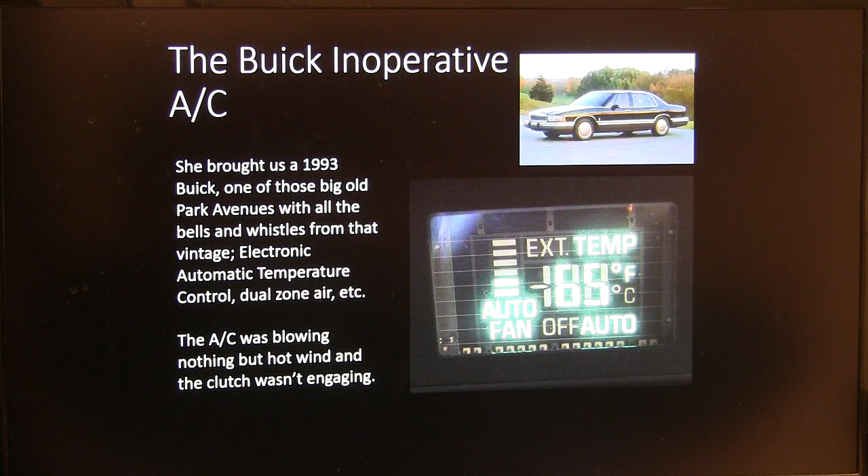Okay, here was a Buick with an inoperative air conditioner. She brought us this 1993 Buick, big old Park Avenue with all the bells and whistles on it. You gotta love those whenever they get an air conditioner problem. AC was blowing nothing but hot wind and the clutch wasn't engaging. First thing I wanted to know was whether or not it had refrigerant in it, and if there was refrigerant, what kind was in there.

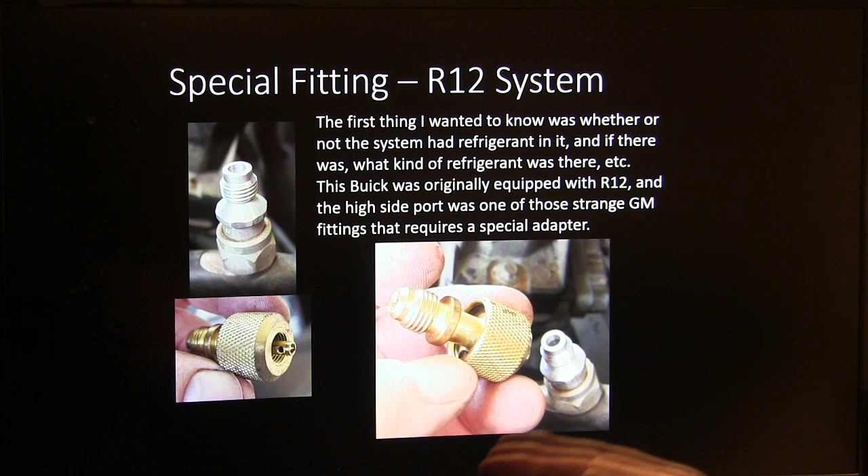This one originally had R12 in it, and the high side port, one of those oddball old GM fittings, required a special adapter. So I went ahead and got that. And this Neutronics refrigerant identifier, the one that I bought initially was like $1,000. I don't know what they cost now, but that's what it looks like. Everybody that's going to be doing air conditioner work needs one, so you'll know what kind of gas is in there before you do a bunch of work.

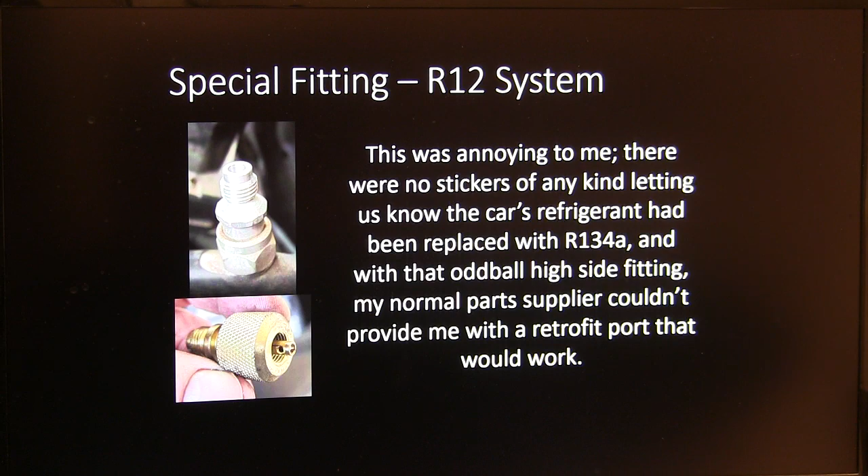So this R12 system was fully loaded with R134, but it still had the original fittings, which is sort of silly. I've seen that 2 or 3 times where somebody had doctored their gauges so they could put R134 in one that was valved for R12. This is a thing of the past. There's almost no vehicles out there anymore that still use R12 or have R12 fittings. Everybody's pretty much changed them over. Well, there were no stickers of any kind letting us know the car's refrigerant had been replaced, but whatever. So anyway, the processing center of that system is the HVAC programmer.

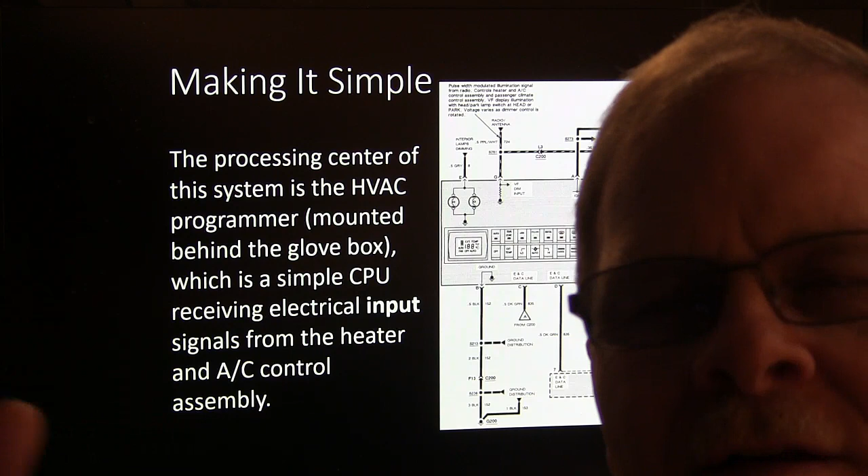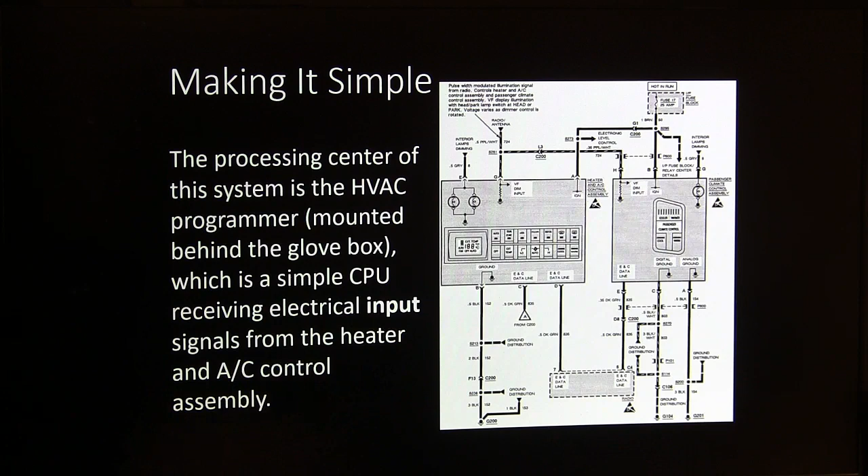GM likes to call the control that gives you your automatic temperature control the HVAC programmer. Even back in the early 70s, the Cadillacs had a great big old thing under the dash, and they called that a programmer. Nowadays they actually do it with different modules, but when they had an AC programmer, even in the late 90s and on up into the early 2000s, it would be a smaller box. One way or another, mounted behind the glove box is a simple CPU that receives electrical input signals from the heater and AC control assembly, and then it decides when the clutch needs to run and all that. It's like a little microprocessor that's just dedicated to AC.

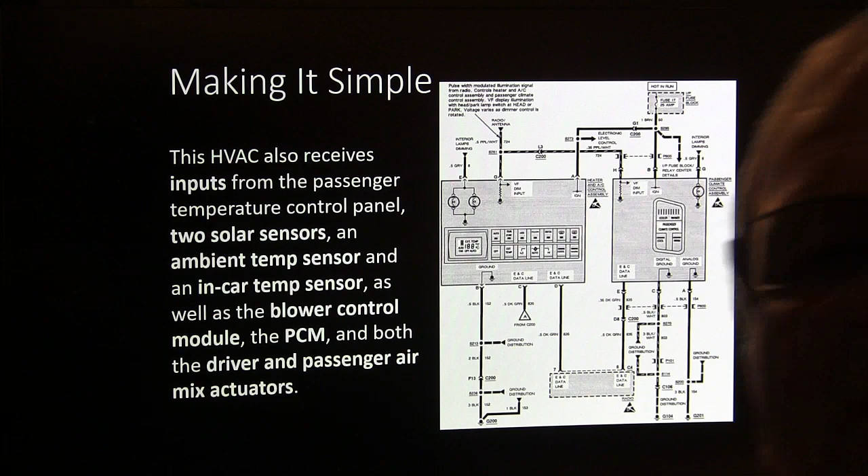Okay, so it receives input from the passenger temperature control panel, 2 solar sensors, an ambient temperature sensor, in-car temperature sensor, blower control module, PCM, both driver and passenger air mix actuators. All of that stuff is in there. This sounds really complicated and like a dog that you wouldn't want to work on, right? Well, we plowed into it anyway. Now the CPU in the HVAC unit untangles all that and feeds these signals out for AC clutch operation. But you might notice the PCM at the end of the day is what tells the clutch to come on. Now there's your little diode there.

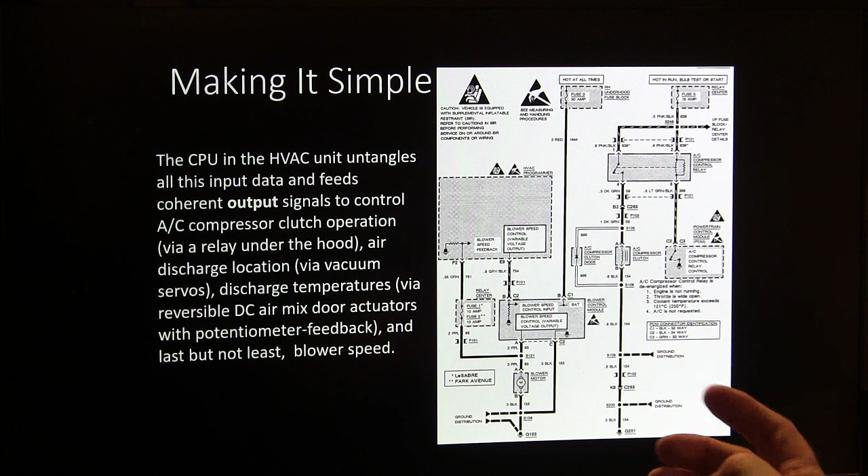And so the long and the short of it was, I got to looking through these schematics. I said, well, the first place I like to go when I do that. So we don't want to bog down in all that. Let's just start simple. Let's wipe out all that stuff and let's just look at what's important.

The compressor clutch relay is de-energized by the PCM when the engine is not running, when the throttle's wide open, when the AC coolant is hotter than 250, or when the AC is turned off.

We focused on the compressor because there was plenty of refrigerant pressure, but the compressor wasn't running. So let's see what we can do with that.

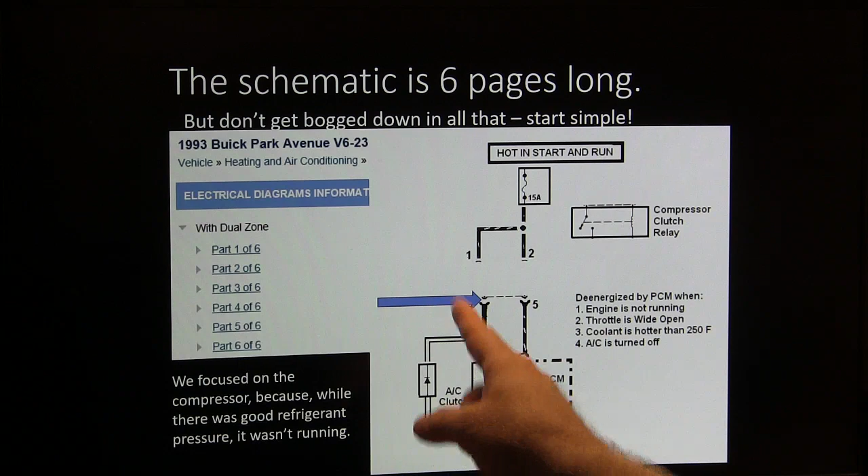We pull the relay out, get our test light, and connect it to hot. Then we check here to see if that light burns — that ground coming through the coil should burn the test light.

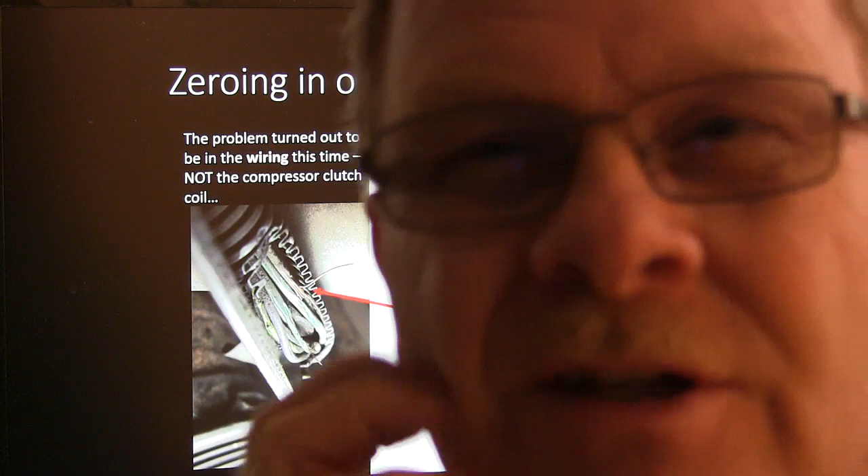The problem turned out to be the same one I showed you before in that other picture of messed up wires from this vehicle. You might remember seeing that picture. This is the vehicle it was originally taken on.

This had been too close to the belt, and it had chopped that ground wire in two. That was the deal — it was either the ground wire or this other wire.

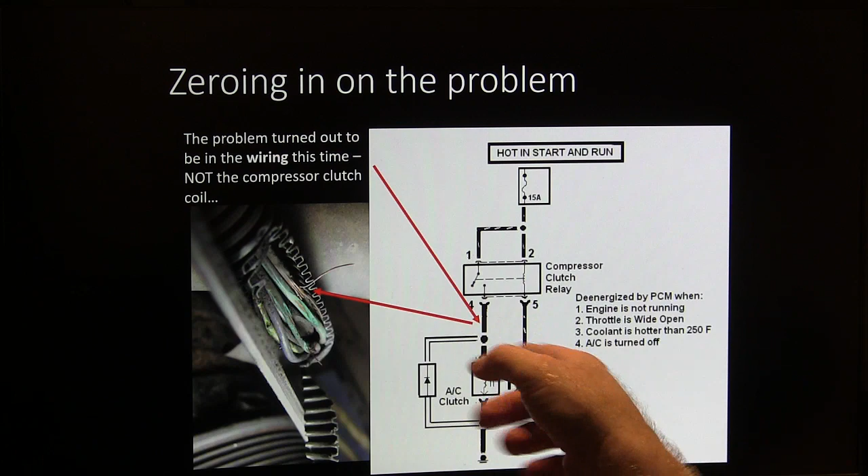I think it was that wire right there. Whatever it was, it had actually broken that circuit, and there was no power getting to the clutch. That's what the deal was on that.

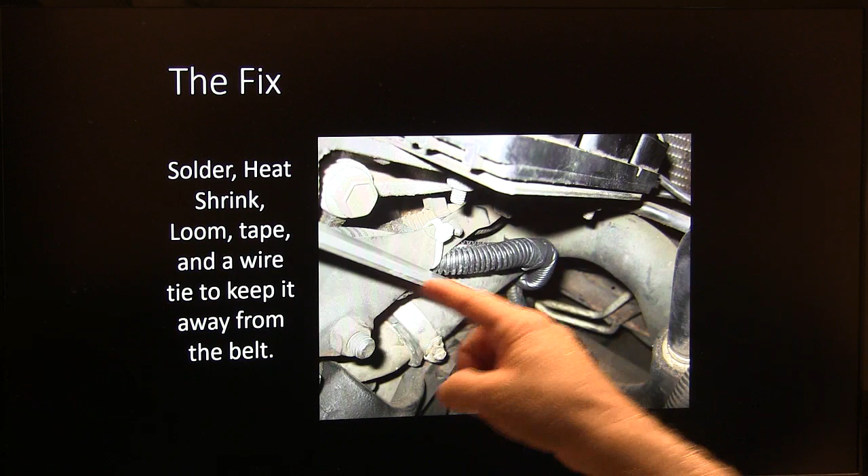So what we did was fix the wire, solder it, heat shrink it, put loom on there, and pull it back to make sure it was away from the belt. I don't know how that happened to begin with, because we had never seen this vehicle before it came to us with this problem.

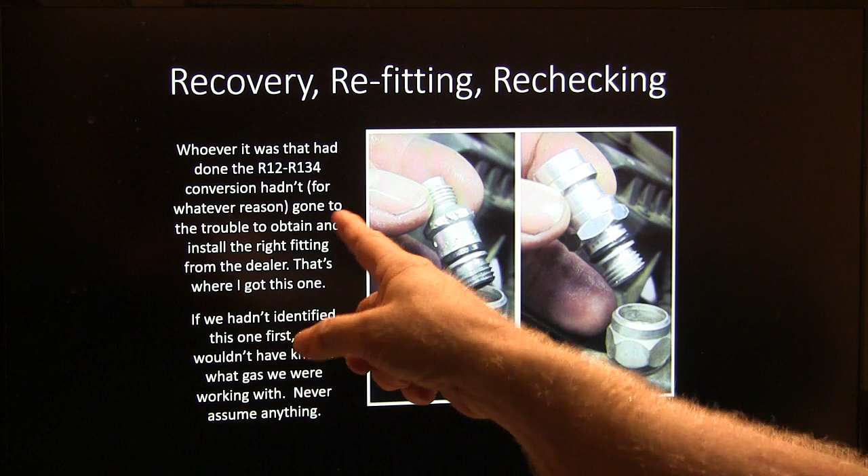Now, whoever had done the R12 to 134 conversion hadn't gone to the trouble to get the right fittings. It wasn't that hard to do — you just screw that one out and screw that one in.

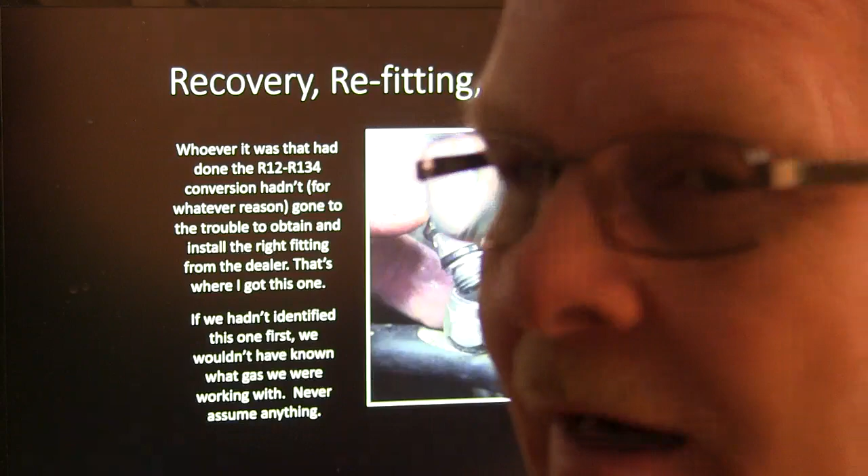I don't know if you've seen this before, but a lot of these GM cars, and pickup trucks particularly — when you're working on these systems, this silly fitting right here, after you've done all your work, suddenly that fitting's leaking. You can get those R134 fittings from the dealer.

You screw it out of there and screw that other one back in, with a little O-ring right there. That's fairly easy to replace in case you ever have one that's leaking.

Some people I've known at some places won't even hook their gauges up to that big port, because they're afraid it's going to start leaking. So they just use the low pressure side port to pull the juice in, and never even hook up to the high pressure side. That's kind of a cop out — you need to know what those pressures are doing.

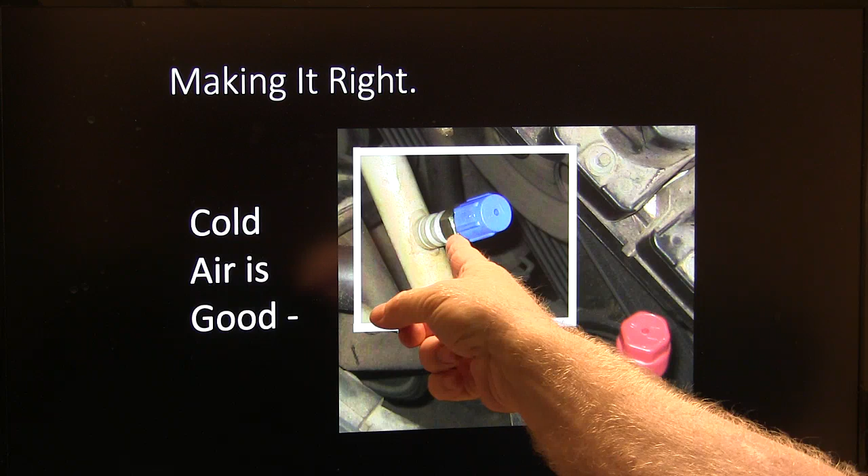That's what we did — we made this one right. We put a fitting there, one like it was supposed to be, and we got the cold air.

Once in 1979, this guy working out there at the place where I was in Texas — he was a construction worker or something, I don't know what job he had — he had an old Chevrolet pickup and said his AC wasn't working. I went over there just horsing around with it. It didn't take but a second to take a piece of wire and bypass his low pressure cutout switch on the accumulator, and the air conditioner kicked on. Everything got cold and started working real good, and I said...

I was just horsing around with him too. He says, 'Oh my goodness, I'm going to have one of those things.' I said, 'Yeah, you need that switch there.' He says, 'Okay, well, how much do I owe you?' I said $65. He goes, '$65? All you did was jump a wire.' Well, you've heard that — all I knew was which wire to jump. I didn't charge him $65, I just made him think I was going to charge him $65.

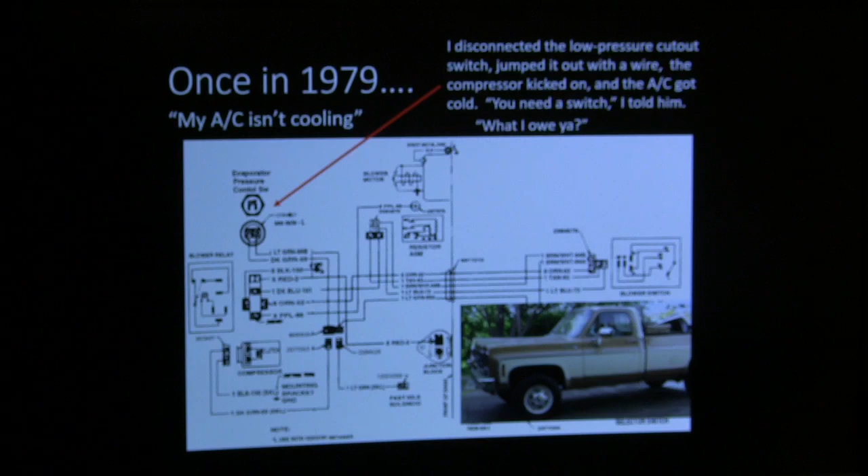No matter what setting he had the blower on, when he hit a bump, it would start blowing on high. I was at the Ford place then, and I brought that thing into my service bay, and I drove it first, and I felt it do that. I hit a bump and it blew, started blowing hard. Switch it off, crank it back up, it's blowing normally.

So I pulled it into my service bay, got a long extension and used it like a pool cue, and just bumped that blower controller under the hood there on the evaporator housing. As soon as I bumped that electronic blower controller, because it had automatic temperature control, the stupid thing kicked on the high blow. I said, well, what are you supposed to think? You bump the thing, and it kicks on the high blow. That's bound to be one of those things.

So I sent up to the Lincoln dealership, which was a different one at the time, and a hundred dollars later we had a blower controller in there, and it was doing the same thing. Bump, and it starts blowing high. What the hell am I supposed to do with that?

Well, I got to investigating this thing, and I found that coming out of there was a relay in that controller that was supposed to close and give you high blow. The wire coming from the control head that energized that relay when you turned it on high was leaking 8 volts. That 8 volts was leaking out of the control head, and it was enough to create magnetism in that coil. But when you bumped it, or it hit a little vibration, it would snap those contacts shut, and it would start blowing on high. And it wouldn't release until you switched it off and killed all the power. When you cranked it back up, you're back where you were.

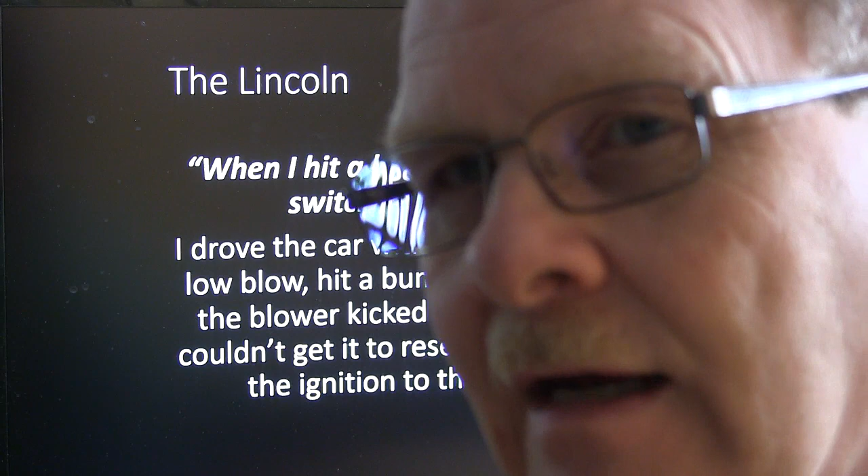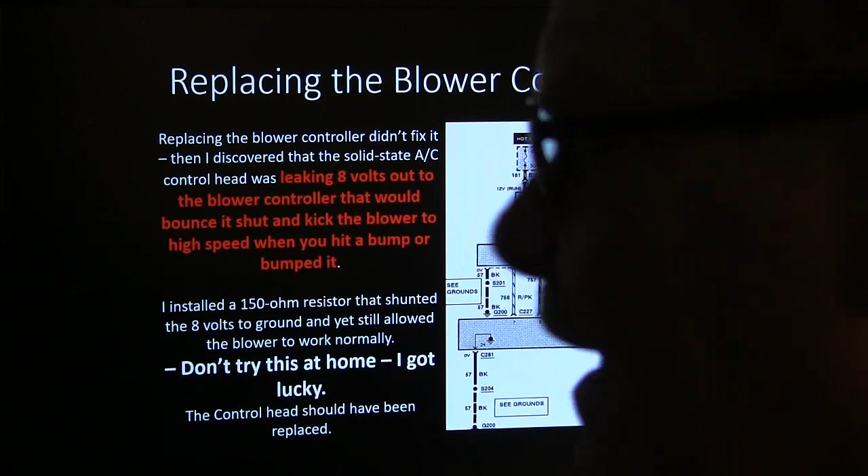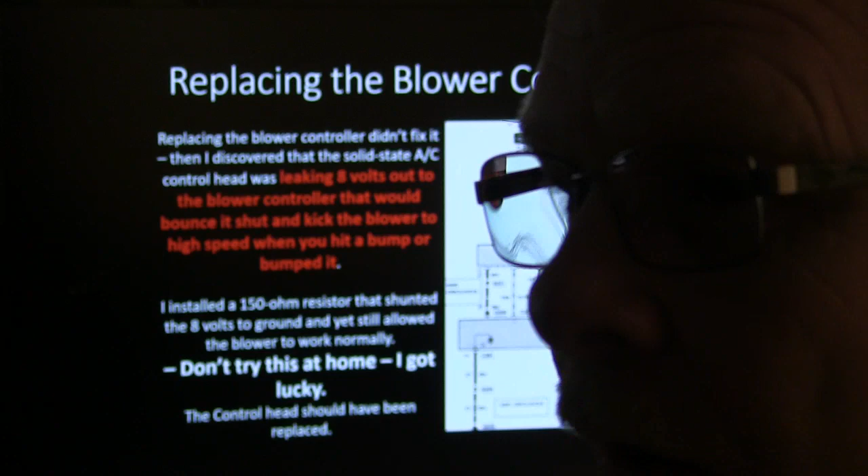I dialed in some resistance that would bleed off that 8 volts, but still allow the control head to turn the blower on high when it needed to. Whenever I figured out what that resistance was by dialing those little potentiometers, I went ahead and did a measurement on that. It was 150 ohms, as I remember. So whenever I put that 150 ohm resistor in there and it shunted that 8 volts to ground, which is basically what I had done with my little gauge tester, the car was fixed. I said, all right, that's pretty cool. Anyway, don't try that at home. I got lucky on that one, but you usually can't get away with stuff like that, you know.

All right, little '83 Diesel Rabbit right here. These little VW Rabbits could have some good AC, but when the compressor kicked on, it felt like you'd lost about half your horsepower. I drove one of those for a long time, and that thing got 55 miles to the gallon. Love that little car. I had worked at the Volkswagen dealer, so I knew how to work on these, and I knew how they were wired up and all that.

But the point is, they've got a little upshift light that tells you when you're supposed to shift to the next gear. To make that work, there's 2 switches here on the throttle, one there and one there. One is for letting off, the other is a wide open throttle switch, and there's one that tells it when you're in idle. But if you were at wide open throttle, it wouldn't ever turn on the shift light. If you were between those two and hit a certain RPM, it's time to shift. So I'm going to use that little sucker right there, the one for 70% throttle, this one.

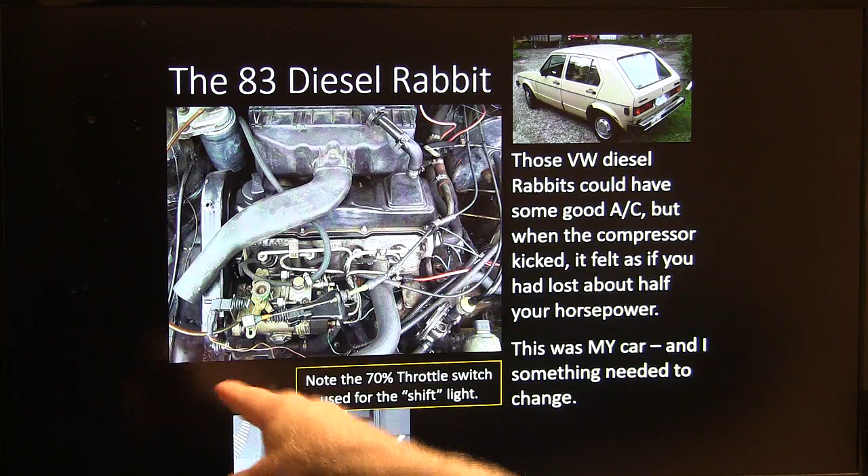What I'm going to do is wire that up so that whenever I added a relay—now I drew this circuit myself using Paint on Microsoft, I do that sometimes—but anyway, the compressor clutch, I wired it between the compressor clutch and the V-plus controls, which is where the power going to the compressor clutch would come from.

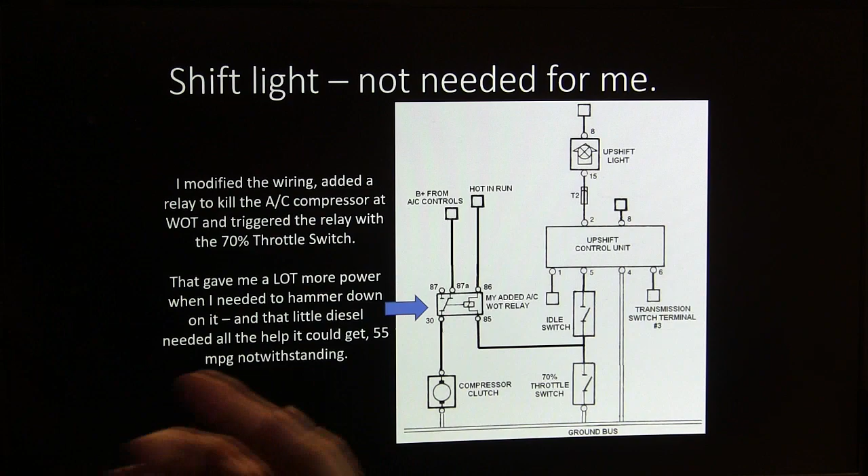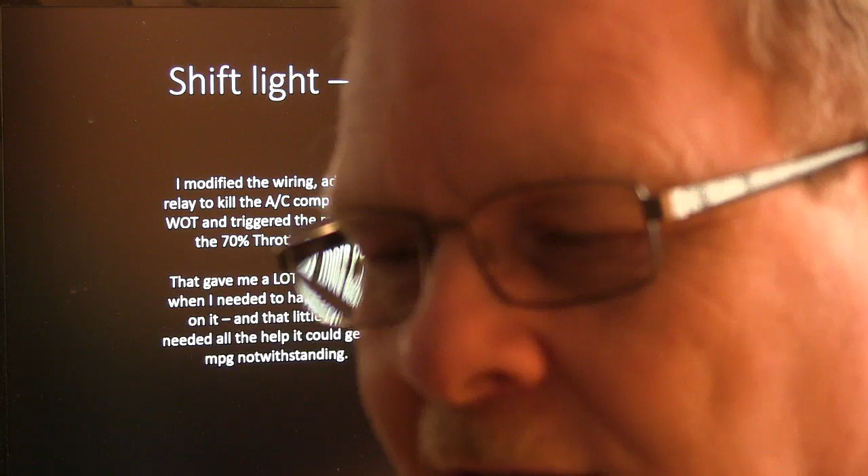And this one here fired up the coil, and I would use the ground from the 70% throttle switch, which I call the wide open throttle switch. If I was at 70% throttle, it would drop the AC compressor—like a wide open throttle cutout relay, like the Fords used to have. That helped me so much when I was getting ready to pass a car. If the air conditioner was on and you went past 70% throttle and gained some speed, it would drop the compressor out, and then you had that little bit extra power you needed.

And there was a way you could adjust the valves and the fuel injector pump to give those things more speed and power, which I did on another one I had that I was playing around with.

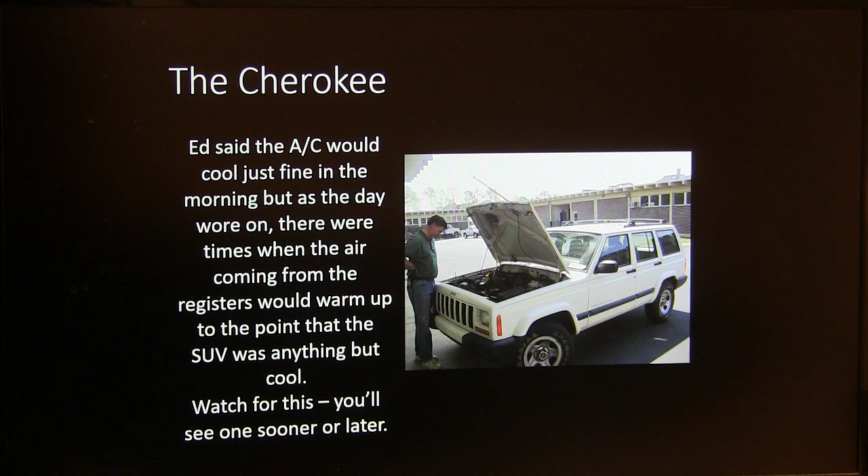Anyway, one way or another, this Cherokee—Ed, this is Ed—said the AC would cool just fine in the morning, but as the day wore on there were times when the air coming from the registers would warm up to where it wasn't cool. Alright, you're gonna see one sooner or later.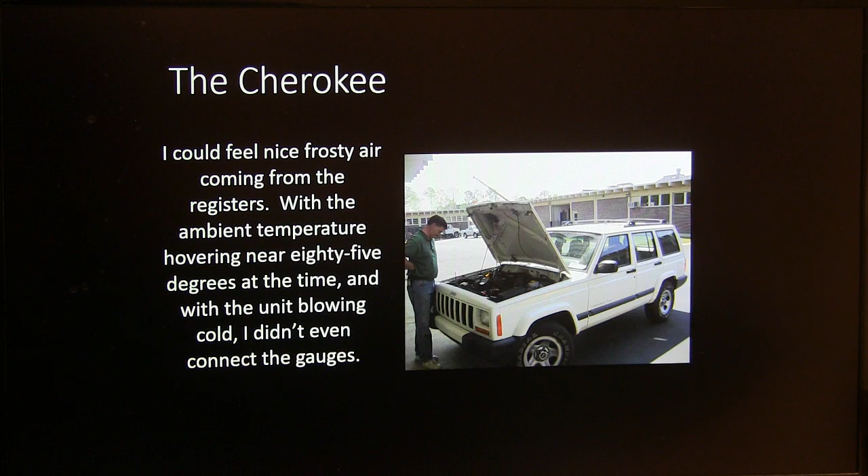I had to feel the frosty air with an ambient temperature near about 85 degrees. The unit was blowing—I didn't even connect the gauges. I said, it's blowing cold. We know you got good juice in there, right?

Now, there are times when you need to hook it up. There was a lady with a Ford Edge, 2012 model, and hers would actually start cooling, but after about 30 minutes it would quit cooling. So I ran that one and watched the gauges and found out it had a bad expansion valve on that one. It's always a good idea to hook the gauges up.

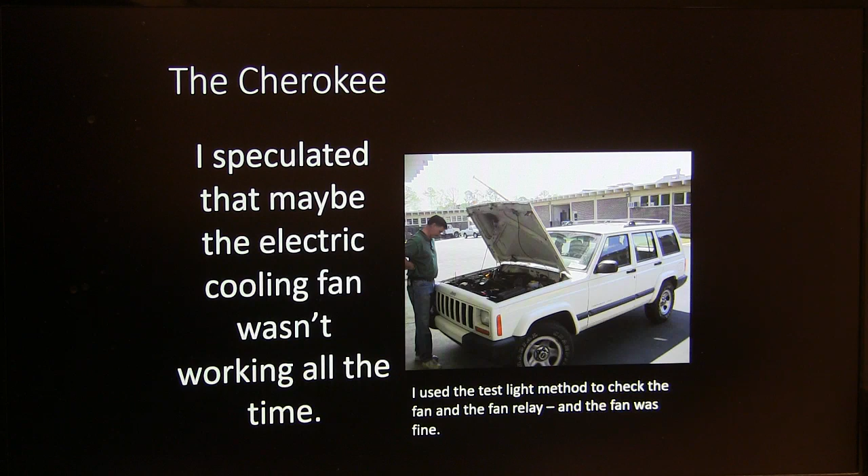I didn't hook it up on this one because I had an idea there wasn't anything wrong with the refrigerant charge. So I checked the fan and the fan relay—it was just fine. Okay, so the system's simple and direct. It's got a PCM controlling the AC clutch and the secondary engine cooling fan through a pair of relays. These relays, you might see, are wired in series and all that—there's an AC switch sense that comes right through all of those, right?

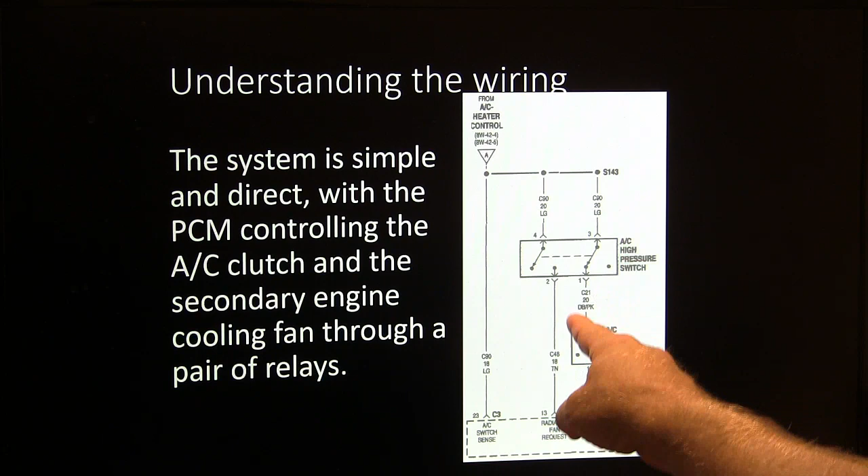The 4-liter package has a water pump driven fan and an electric fan to assist in cooling if the AC head pressure goes too high and the engine gets too hot. This is two switches in one. One of them requests the fan, and the other one is a ganged switch operating at the same time.

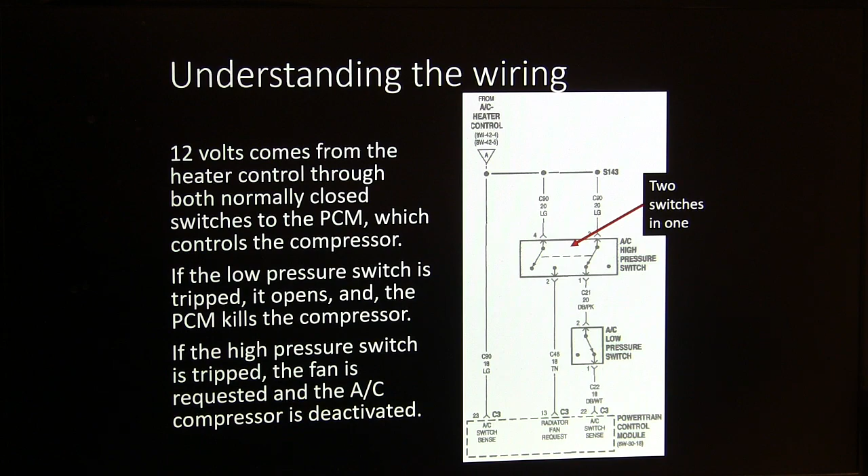If the low pressure switch is tripped, it opens the PCM and kills the compressor. If the high pressure switch is tripped, the fan is requested and the AC compressor is deactivated, and so forth. So as the compressor cycled, we watched it change state several times.

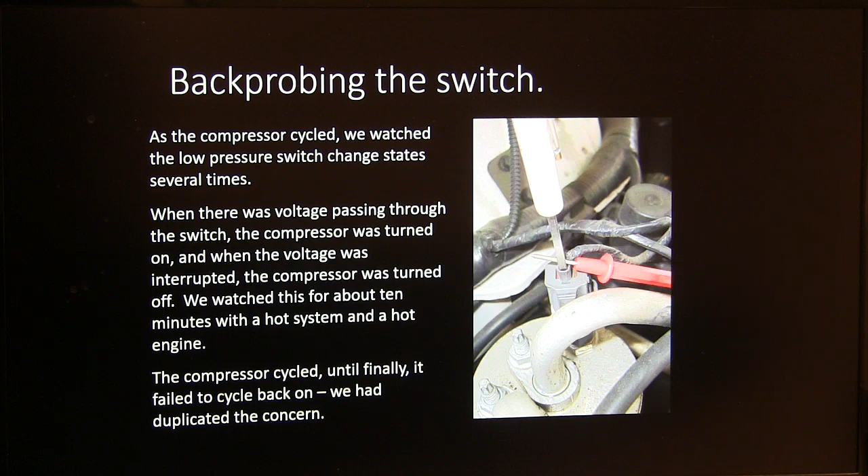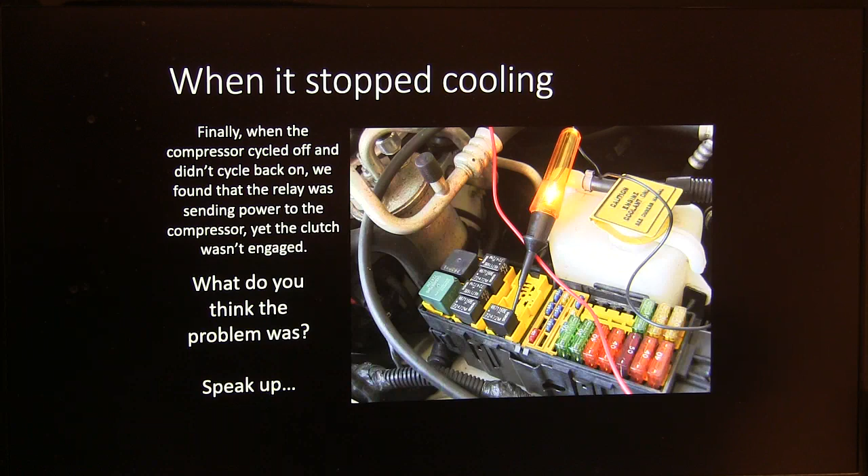But anyway, it didn't cycle back on one time when it cycled off. So I got under the relay right here with my test light, and I noticed there was power leaving the relay going to the compressor clutch, but the compressor clutch wasn't energized.

Alright, so what would you do? What you do there is you bump the clutch. Now you need to be bumping it in the direction it spins, so don't bump it so that when it kicks in it throws your screwdriver back and it goes through your eyeball. You need to be really careful how you do this because it can be dangerous.

And if the compressor is just really hard to get to, it's going to be difficult to do this safely. But you need to do it in such a way that if it's turning clockwise, you need to bump it so it'll be going away from whatever you bumped it with, not going toward it.

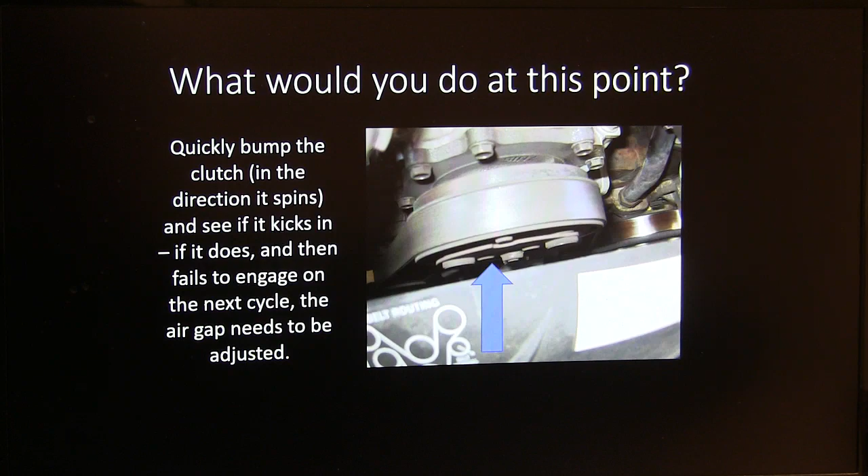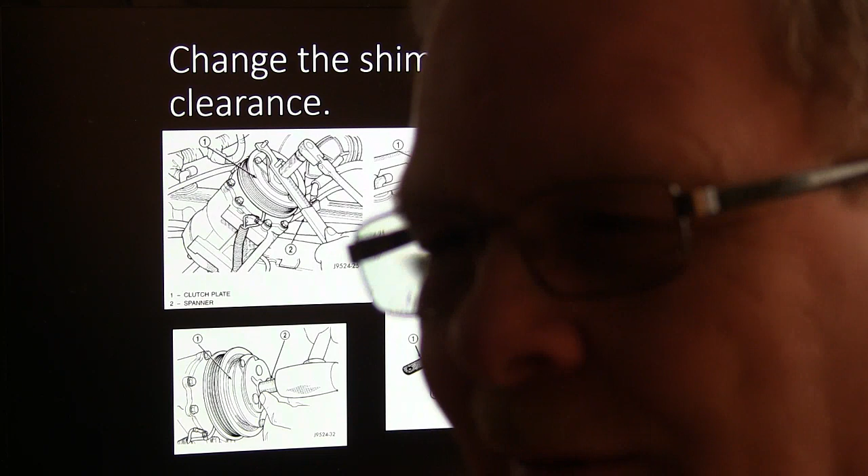Anyway, this one here, when I bumped it, it went in, the air gap needed to be adjusted. As that thing wears, the air gap gets a little too wide, so you need to set it. Usually you can look up your air gap spec, it's usually about 20 thousandths or something like that. If the air gap doesn't meet the spec, add or subtract shims as required. It says 16 to 31 thousandths of an inch.

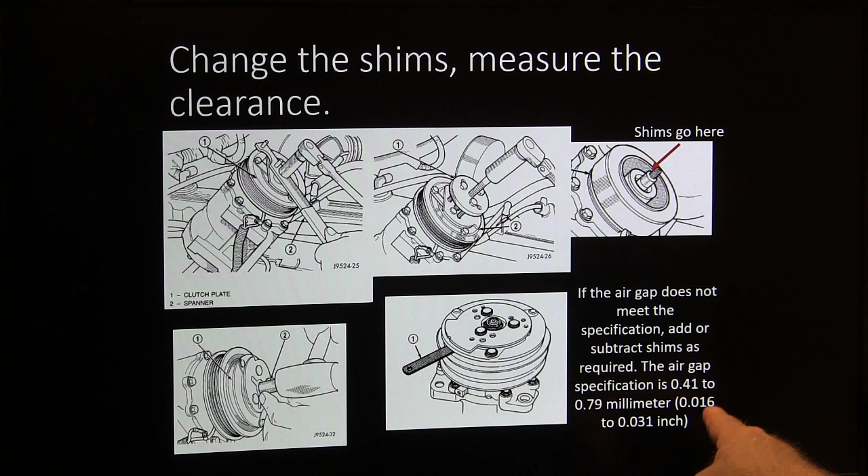Or 0.41 to 0.79 millimeters. Alright, let's look at this one here.

Technician A says many of today's modern automotive AC units use a thermistor in the evaporator to prevent evaporator icing. Technician B says refrigerant pressure is directly related to refrigerant temperature. Who's correct about that?

Which one of these would not cause the evaporator to freeze up? Stuck closed relay, stuck closed low pressure cutout switch, bad coolant fan relay, or a compressor that won't shut off.

Technician A says the compressor will cycle more often with the blower on low. Technician B says the vehicle will actually get better fuel economy on a long trip with the AC on max or recirc than it will on norm. Who's correct about that?

On a vehicle where the AC is blowing warm air, but the compressor is running normally, the gauges are showing these readings, and the suction line is cold all the way to the compressor. What's the most likely cause of the problem?

When your suction line is cold all the way to the compressor, but you're reading close to 225 up there, and this is on a warm day, but you're actually not feeling any cold air coming out of your register.

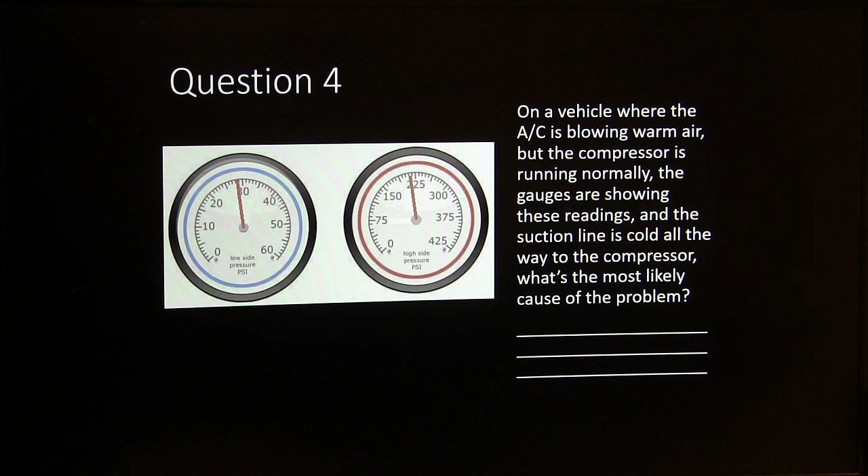AC's not cooling, compressor's running, suction line not cold. What's the most likely cause of these readings?

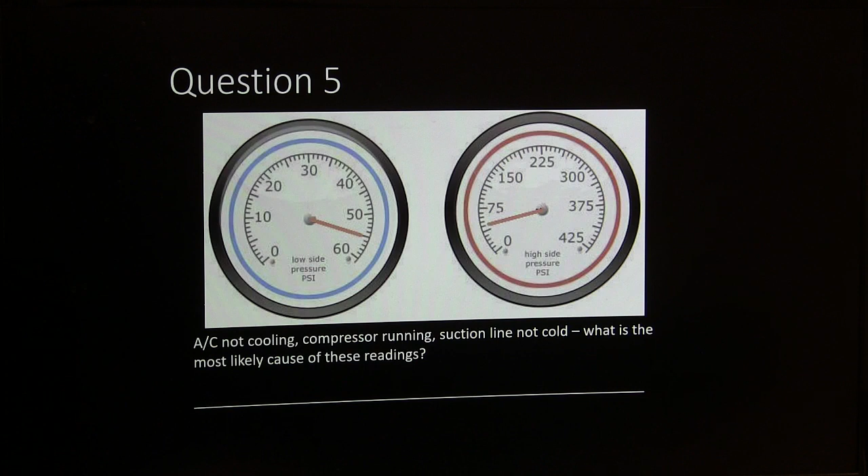Fully charged system, compressor running, AC not cooling. What's the most likely concern with this one?

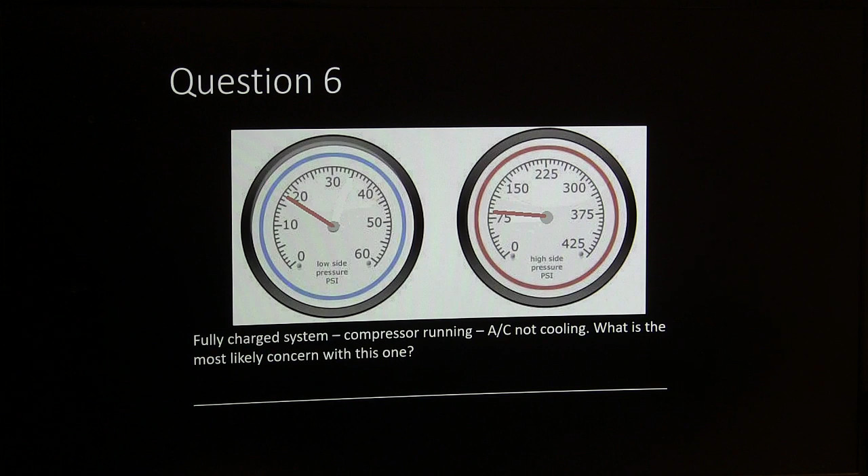I hope when I did these answers I didn't get these mixed up. We'll see. Compressor running, AC starts out cooling well, then stops cooling. Compressor belt starts squealing, or compressor clutch starts slipping. What's the most likely cause of that?

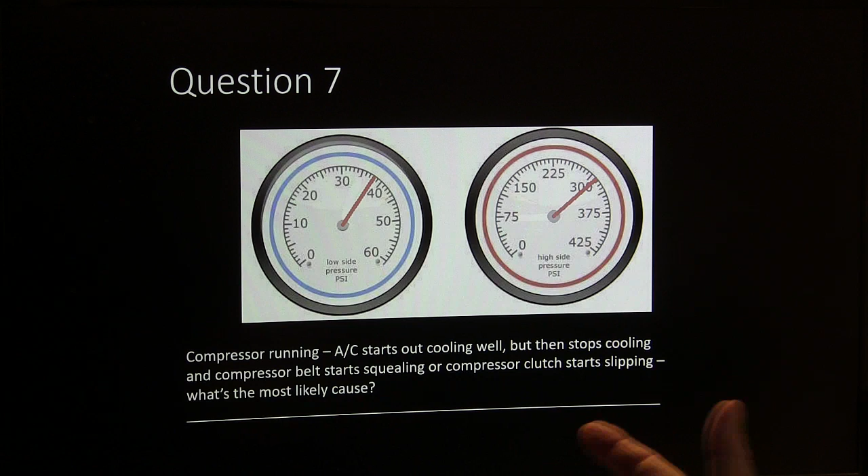Now let's grade the test.

Both these guys are right. As a matter of fact, most systems nowadays have an evaporator temperature thermistor to keep it from freezing up. Refrigerant pressure is directly related to refrigerant temperature. It's not necessarily pound per degree, but it's really close. When you've got high pressure, you'll have high temperature with refrigerant. Low pressure means low temperature. This wouldn't cause the evaporator to freeze up.

A bad coolant fan relay would not cause the evaporator to freeze up. So what's a bad coolant fan relay going to do? It's going to cause the head pressure to go up. That's not going to freeze the evaporator up. That's going to make everything get hotter, if anything.

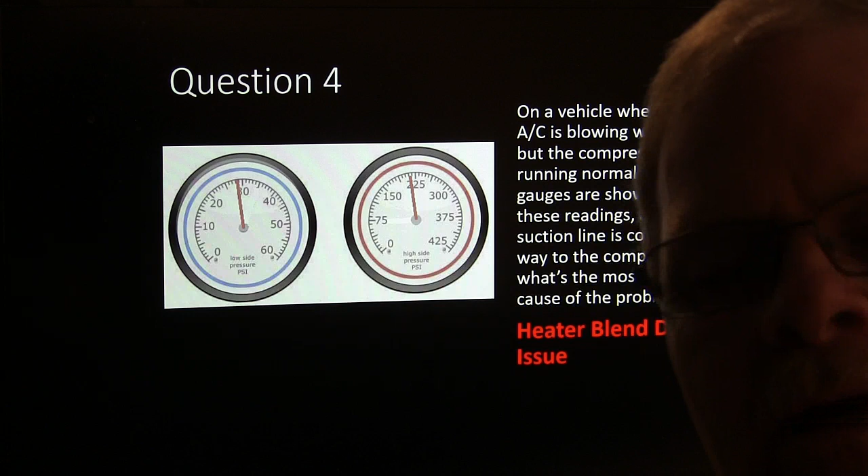Alright, this is going to be a heater blend door issue. One of the things we used to do is make sure we're on the right heater pipe. Whenever you're on the right heater pipe, you can actually close off your coolant going through the heater core. Even on the ones that have a heater control valve, whenever they close off, it's still circulating through the heater control valve.

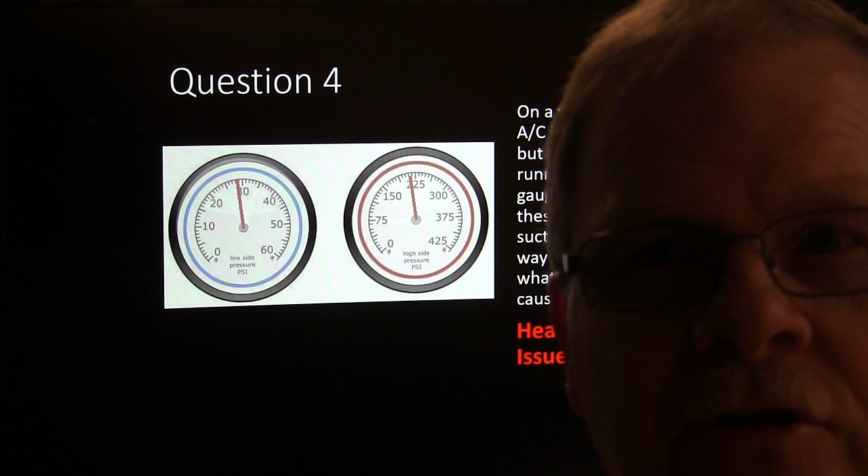It's just not going to the heater core. But if you can keep that coolant from going to the heater core, and if you pinch the one coming from the heater core, you may bust the heater core. So be aware of that. Don't pinch the wrong one, okay? Pinch the one going to it, but you've got to know which is which. Don't guess at it.

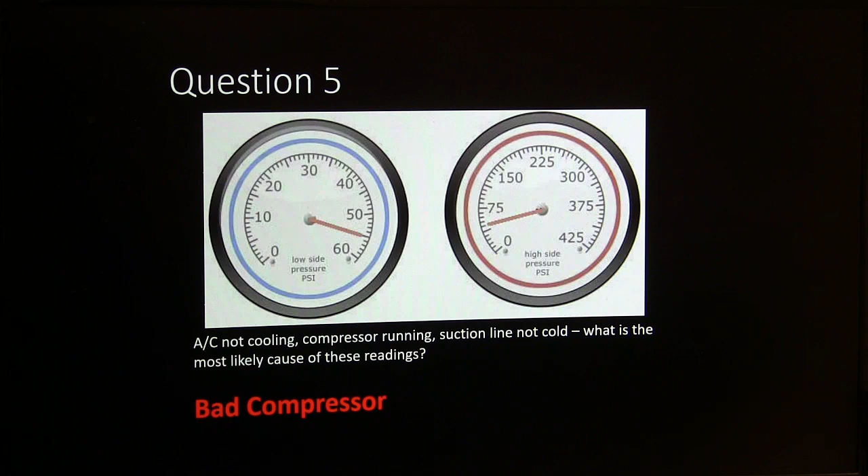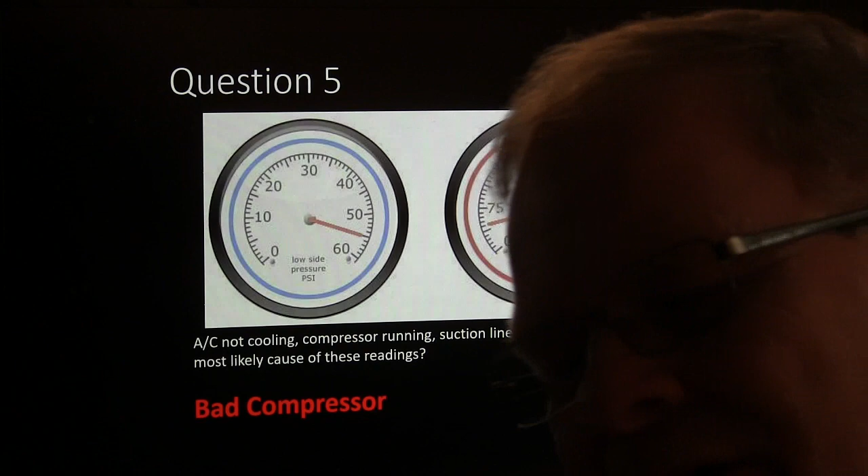AC not cooling, compressor running, suction line not cold. This is high, that's low, it's a bad compressor just about every time. You see this a lot on those little scroll type compressors. They like to crap out.

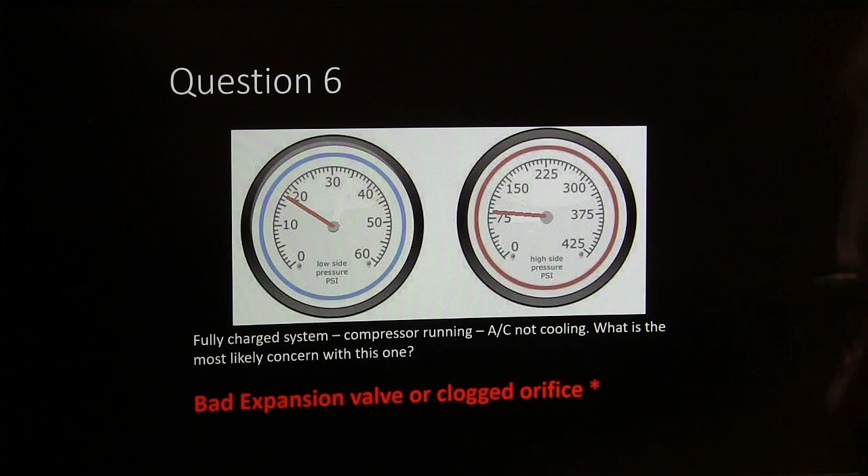Fully charged system, compressor running, AC not cooling. Both sides are low, that's a bad expansion valve or a clogged orifice. One time we saw this on a Toyota, put an expansion valve on it, it didn't fix it. It turned out it had to have a new evaporator. I don't really understand that because you could actually blow air through that evaporator. But when we put an evaporator on it, after having replaced the expansion valve, it took care of the whole problem. The pressure normalized and it started cooling. Sometimes you'll have a mystery you've got to solve.

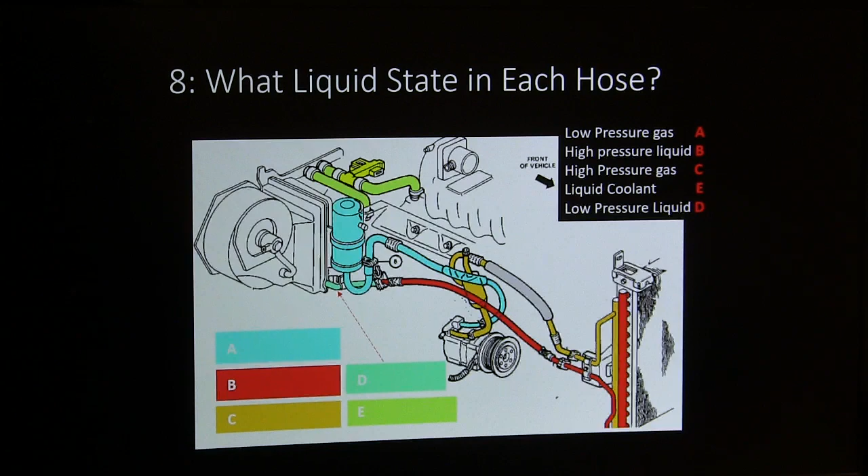Okay, so this right here is going to have low pressure gas. That's your suction line right there, and it's coming this way. Alright, B is going to be high pressure liquid, that red is actually traveling in this direction. Alright, C is going to be your high pressure gas, and that's going to be the discharge line coming out of there and going to the condenser. So this is going in here, coming out there, and then coming back over here.

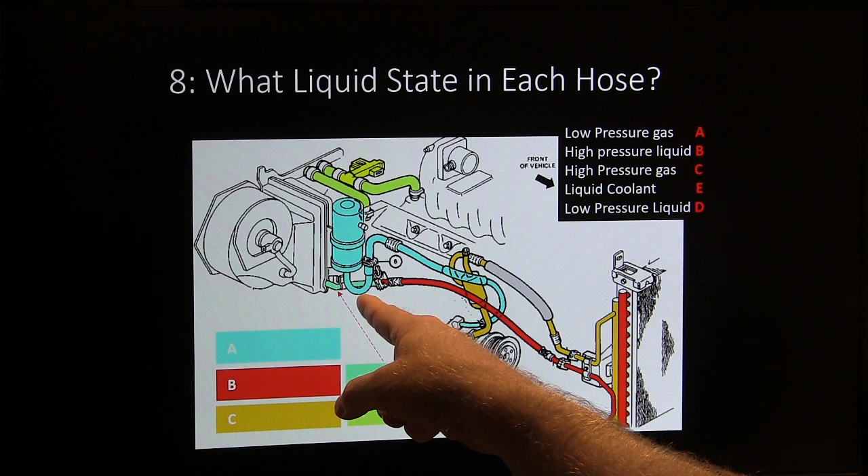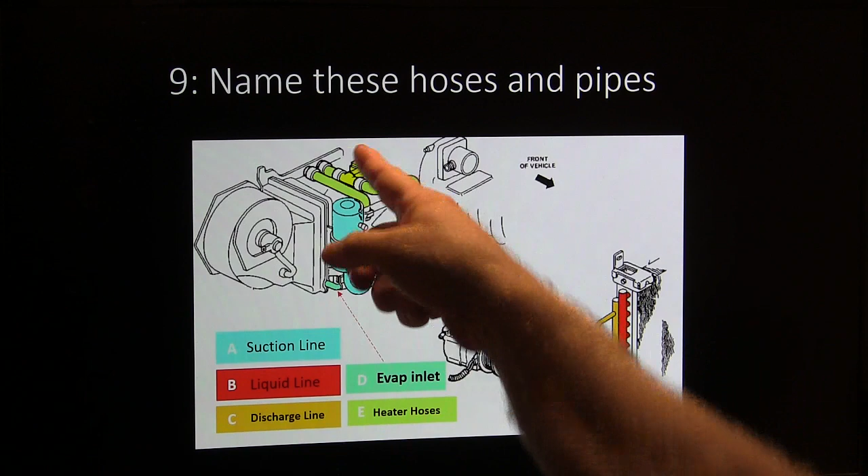And then D is going to be that little place right there where you got low pressure liquid, which is getting ready to evaporate. Suction line, liquid line, discharge line, evaporator inlet, and heater hoses. Heater hoses up there. That is a cold engine lockout switch on some of your older Fords is what that is. Alright, blower doesn't work on high, faulty blower motor relay.

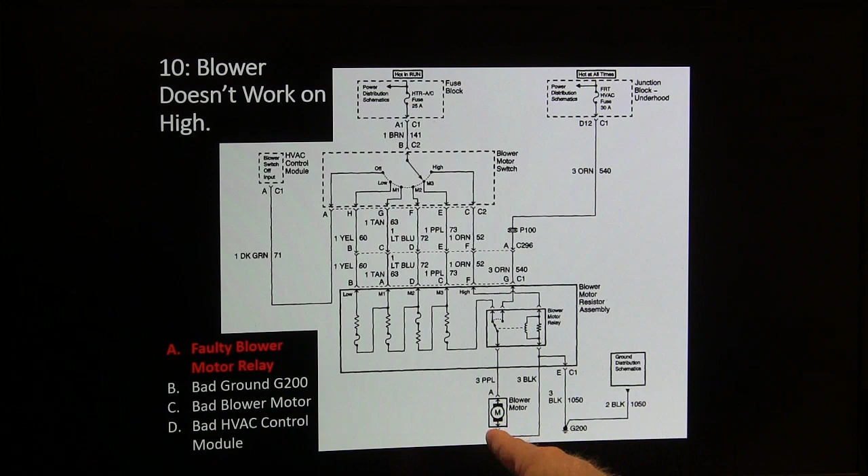Now if that fuse is blown, you'll have the same situation. If that fuse is blown, it will not have anything to give that motor, even if that relay closes. And I used to plant a bug on some of the Chevy pickups I had over there by putting a bad fuse right here. And one of the crazy things is if they weren't real familiar, you had to be able to read a schematic and think and reason and all that kind of stuff. And if you can't trace the wiring schematic, you got some issues. You got big trouble there.

So anyway, that winds that thing up right there. I hope you got some good out of that. One of the things that I like to do, I'm going to finish this up with a story because I got about 4 minutes left before this thing cuts off on me.

Lady come with a 2010 Altima. She said, I went to the shop up there in the other part of town, and she said my AC was working fine, it just quit working all of a sudden. And this kid come out there with a flashlight looking around. He goes, well, I don't know what's wrong with it. It's probably going to be $1,000. What? Anyway, so she brings it over there.

I got a test light and hooked it hot, and I found the wire going down to the AC compressor clutch, and I went into that wire. I was going to see if it had power going to the clutch, but I didn't get a ground there. And what that told me, that the compressor clutch coil was burned out. And so we put our compressor on there, and on that particular car, the labor time was like 8/10 of an hour to replace the compressor. The whole job, if you squeezed it really hard, you might get the price of the compressor plus $100 out of it or something. I don't know where that $1,000 came from.